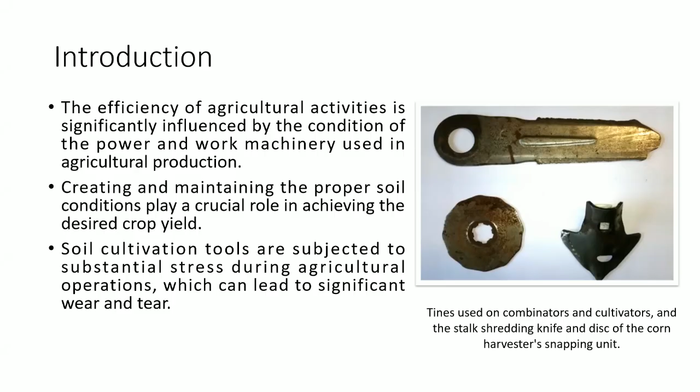Hot metal spray fusing technology is what we used in this previous process. Hot metal spraying is a surface repair process widely used in today's technology. During the method, metal powder is heated and sprayed onto the surface to be repaired at high pressure, thus providing excellent adhesion and corrosion resistance.

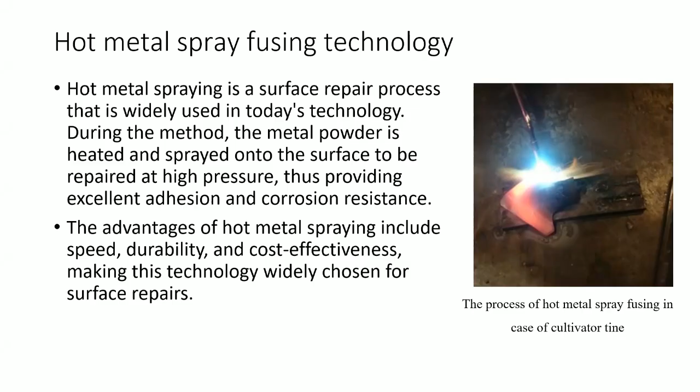It is widely known the advantages of hot metal spraying include speed, durability, and cost efficiency, making this technology widely chosen for surface repairs. Here is the cultivator tine, which is sprayed with hot metal powder by us.

At this point we made some specimens. We created 8 test specimens, which were coated with different kinds of alloy powders like Eutalloy alloy powders, N60 Mogul alloy powders, and 50% Mogul and 50% tungsten carbide alloy powders.

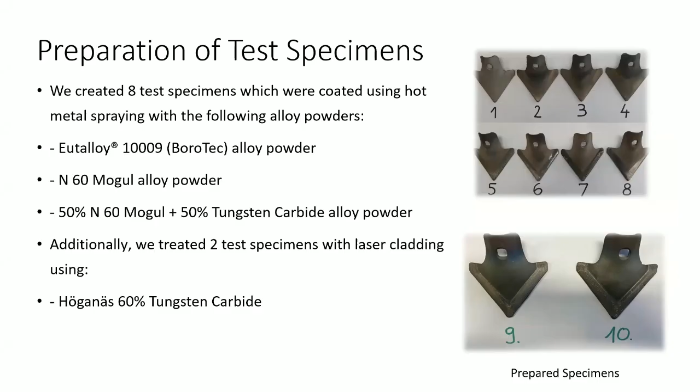Additionally, we made 2 other specimens which were made by laser cladding technology, and after the coating, we made laser remelting with this layer.

We realized when we checked the layer that it's much harder than expected, so we created a better surface than was expected from the powder. Here is the laser we used for remelting, and here is a specimen where we found the right

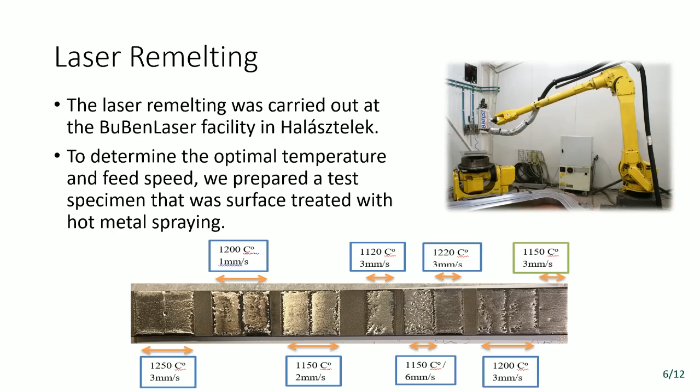temperature and feed speed for the laser. That was the point when we realized that we had to check how this layer builds up.

So this is basically the research we are doing. We aim to examine the wear resistance of the applied coating using AI in order to predict the tool life.

Currently I'm writing a review article on AI-based predictive maintenance in agriculture, and we are trying to focus on integrating artificial intelligence and agricultural informatics into machinery diagnostics. We are studying machine learning models such as random forest, LSTM, neural network, and extreme gradient boosting.

We are focusing mainly on exploring digital twins for real-time simulations, sensor networks for data collection, and explainable AI techniques for transparent decision making.

For progress in 2025 and 2026, we are trying to focus on reviewing the literature. We have to understand AI and machine learning techniques, and we are trying to replicate their prediction models.

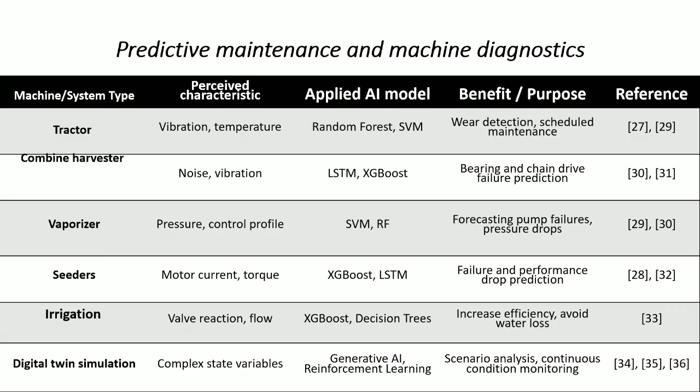Seeders use motor and torque sensors, and the irrigators check flows mainly. And here we can see what kind of AI models are used for this.

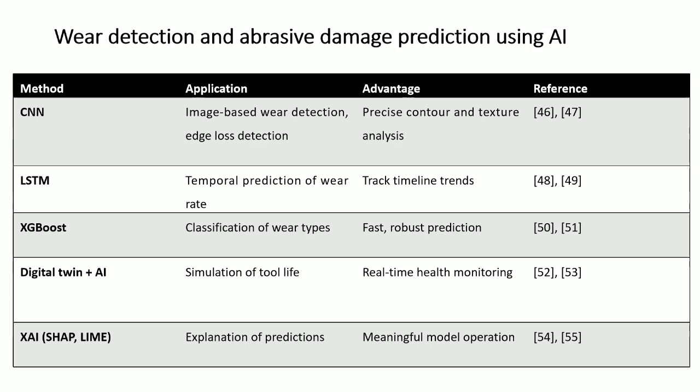At the next point, I started to check wear detection and abrasive damage prediction using AI, which are already used. So here are the methods: CNN neural network, LSTM, XGBoost, digital twins, plus AI, and XAI as well. And here we can see the applications and advantages of them.

Next I made a comparison of AI algorithms in agricultural engineering, like what algorithms are used, and the benefits and limits of them.

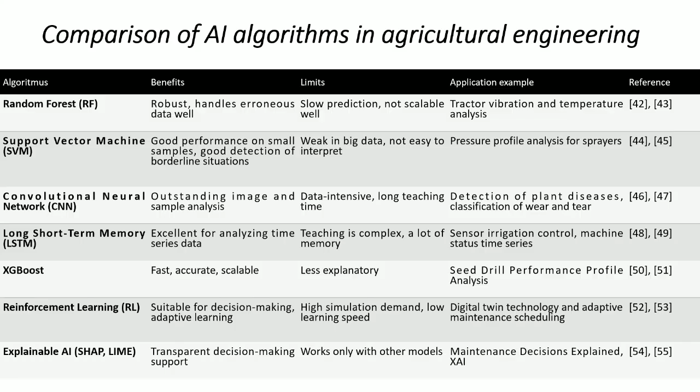CNN has data intensive requirements and long teaching time. LSTM teaching is complex and requires a lot of memory. XGBoost lacks explanatory power. Reinforcement learning has high simulation demand and low learning speed. And explainable AI only works with other models. So these are the limits.

I would like to highlight the benefit of this research. We aim to develop an AI-based model that determines the degree of wear on agricultural tool surfaces using photographs and 3D scans.

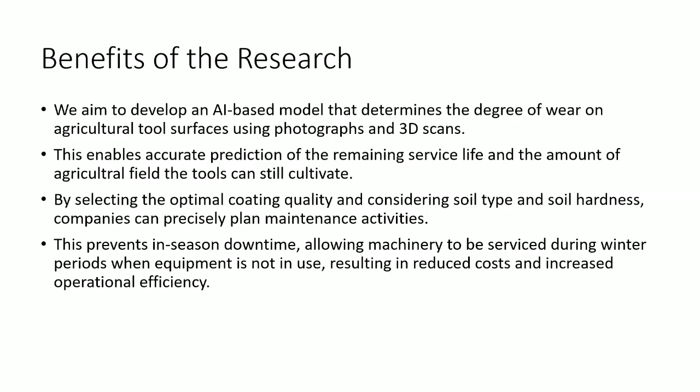This can enable accurate prediction of the remaining service life and the amount of agricultural field the tools can still cultivate. By selecting the optimal coating quality and considering soil type and soil hardness, companies and farmers can precisely plan maintenance activities. This prevents in-season downtime, allowing machinery to be serviced during winter, for example, when equipment is not in use, resulting in reduced cost and increased operational efficiency.